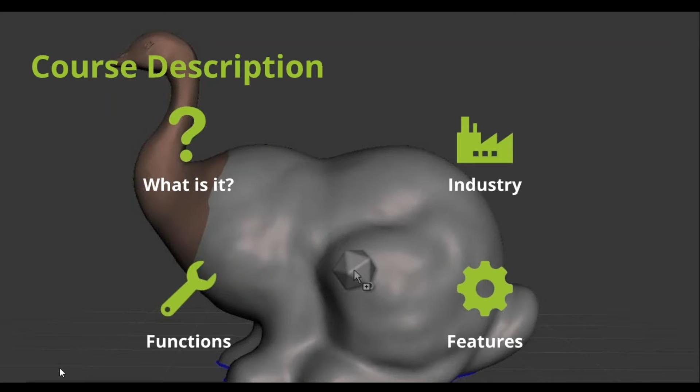Well, let's go into some of what's in the course. For the audience, we have an Intro to Meshmixer course, a Meshmixer Essentials course, working with 3D scans in Meshmixer, creating models from photos, and then Meshmixer for Kids. This is a very extensive library that Nick has created for our community, and I want to give Nick a moment to talk about how he came up with the course. You heard the history with the Kickstarter program, but Nick, tell us a little bit about the structure.

Yeah, absolutely. We've worked with SolidProfessor to come up with an architecture that really does make sense. We have an Intro to Meshmixer, which goes into understanding how the program works. When you start Meshmixer, there's some tools down the left-hand side. We go into what those tools do so that you can understand how the programmers of Meshmixer want you to use it.

And then we go into the Meshmixer Essentials, which is the workflows and how to accomplish certain things with Meshmixer. Once you have the base understanding of the program, you figure out what you want to accomplish, and there will be a Meshmixer Essential to accomplish that, whether it's working with 3D scans, freeform sculpting, or even creating support structures for 3D printing. There's a lot of different workflow things for the essentials. Then we have specialized classes after that, kids classes, sculpting classes, and more specialized content that not everybody wants, but the people that really do want it should be treated appropriately and have a specific class for it.

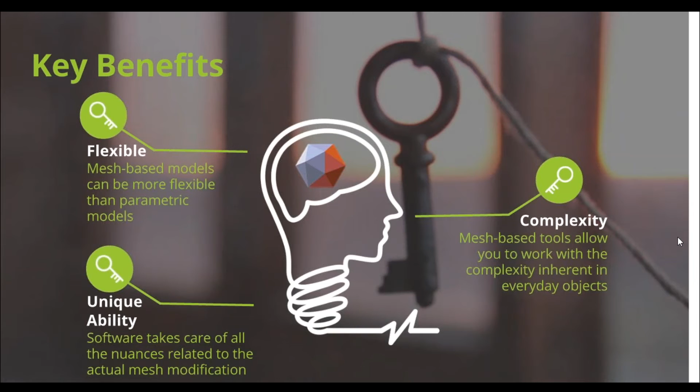If you're 3D printing, there's also a whole section of Meshmixer that evaluates models for 3D printing, so you can create support structures that are organic, kind of like the branches of a tree. In my own 3D printing experience, models that take 5 hours with traditional support structures can be brought down to about 3 hours with Meshmixer's support structures. So a lot of really good benefits that don't exist in any other program.

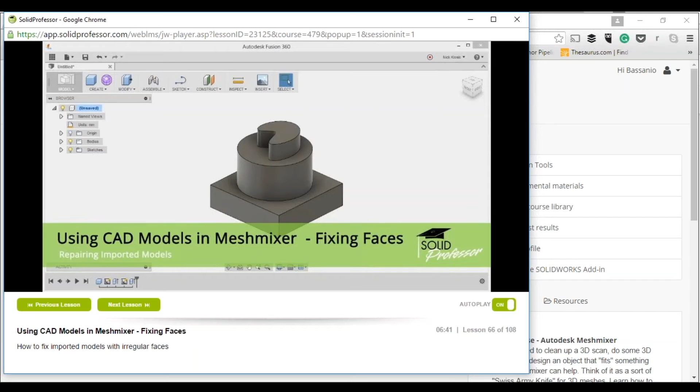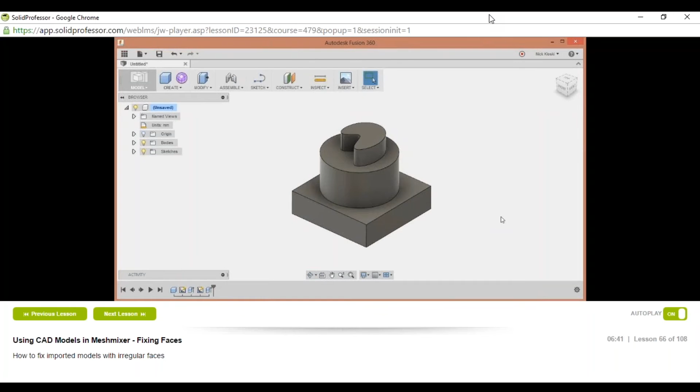Okay, so here's one gotcha when you want to go from parametric CAD modeling into Meshmixer. I modeled something here in Fusion 360, the parametric program, kind of like a little pedestal or awards statue, and I might want to put something organic on top. So I want to bring this into Meshmixer and start working with it. I go into bodies here and export as STL, and send it directly into Meshmixer, so I click OK. After a second, Meshmixer comes up and we get the object right here.

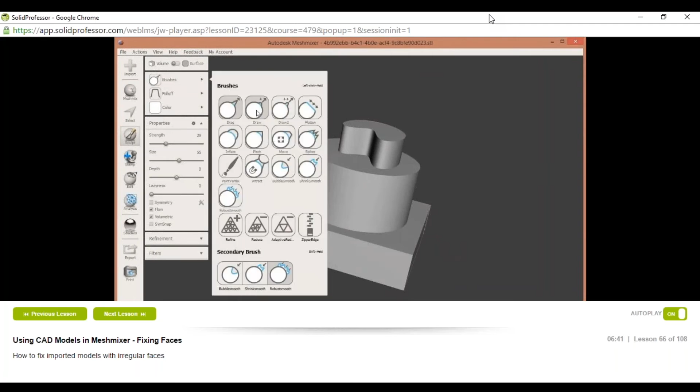So, good enough. We start going into the Sculpt tool, maybe with a draw brush, get a nice big size, and start working, and the entire model just starts to blow up the moment we touch it. It didn't blow up as much here, but I'll tell you why. I'm going to undo this. So this model, if I hit the W key for wireframe, you can see that, and maybe a little bit dark.

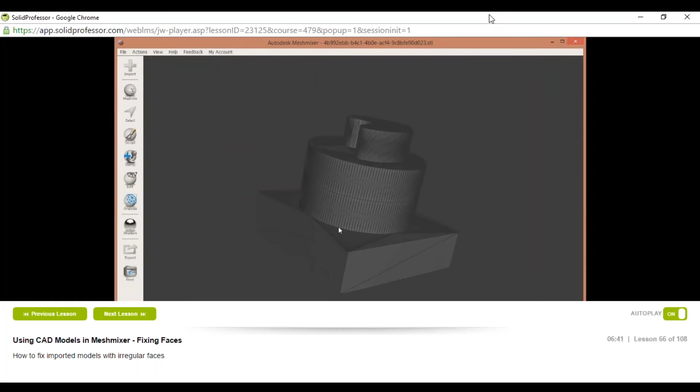So I'll go in. When your model goes dark like this, sometimes you have your object not selected. So you go up to Show Objects Browser and make sure that your object is selected.

So you can see up here that we do have a lot of triangles, and down here we have no triangles. Because Meshmixer wants to work with a lot of triangles, when you hit it with a tool like the...

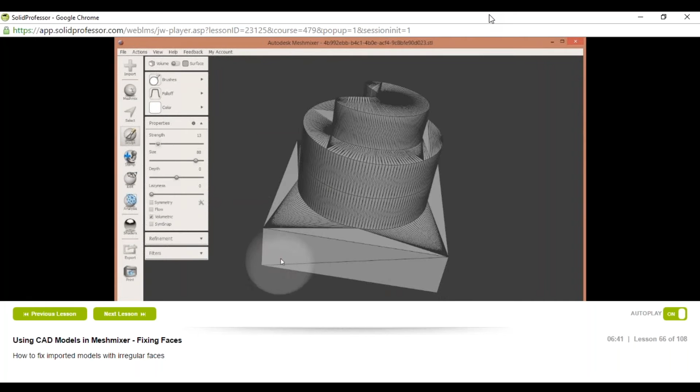Sculpt tool - I'll turn flow off - even at a low strength, it only has 2 triangles to work with, so it starts to do weird things. It changed the entire 3 faces of the bottom.

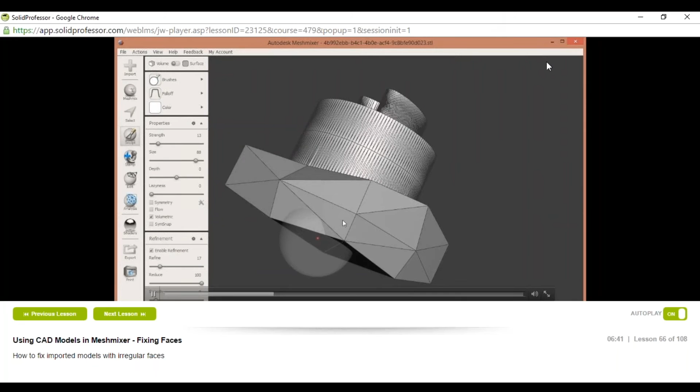Because it only has 2 triangles, and because I have refinement turned on, it starts to add them. But adding more triangles when you only have 2 to start with ends up making huge changes to your mesh.

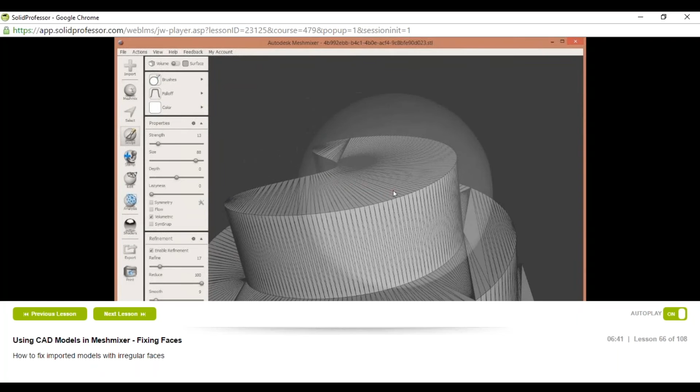If we try to do this up here, the triangles are a little bit more dense, but even up here you start to get weirdness happening, because if I undo this, these triangles go all the way from this side all the way down here. Even though they're skinny like this, they encompass the entire face. So trying to make a change to one triangle ends up changing your entire face like this.

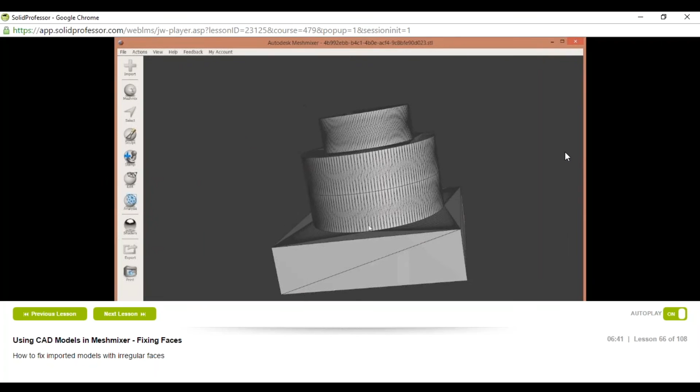And you see this a lot in models that you download from online websites that are created in parametric CAD software. So there's a very, very simple trick to get around this. You need more density inside of this.

I'm going to click on Select and hit Control-A to select everything, or Command-A on a Mac. Everything is selected. We'll go up here to Edit, to Remesh, and you want to choose Linear Subdivision.

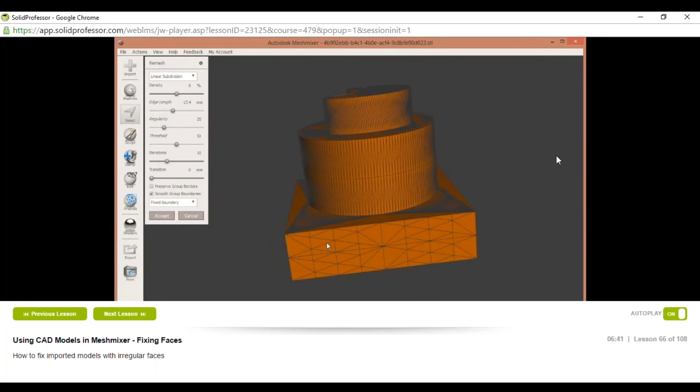What Linear Subdivision will do is divide the triangles that are already there into smaller triangles. So it doesn't change the shape at all, it just adds more density inside. So you're still going to end up with triangles, but your shape isn't changed.

If you did something like relative density or adaptive density, even if it's very, very turned up, you end up with kind of weirdness here.

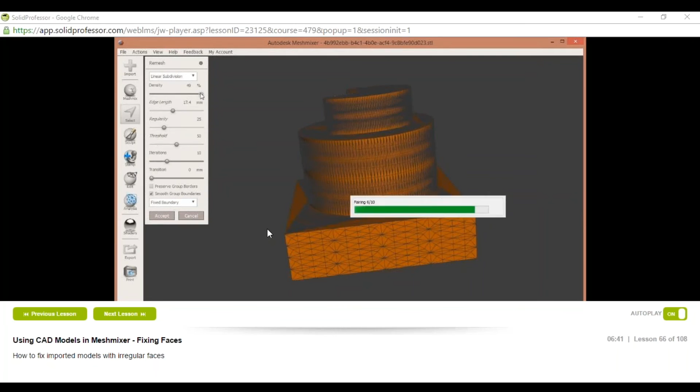So what we're going to do is go to Linear Subdivision and turn it up as high as it will go. Remember, these triangles went from this side to this side - now you see that you have a band here, a band here, a band here. You have a lot more triangles to work with that don't go from face to face.

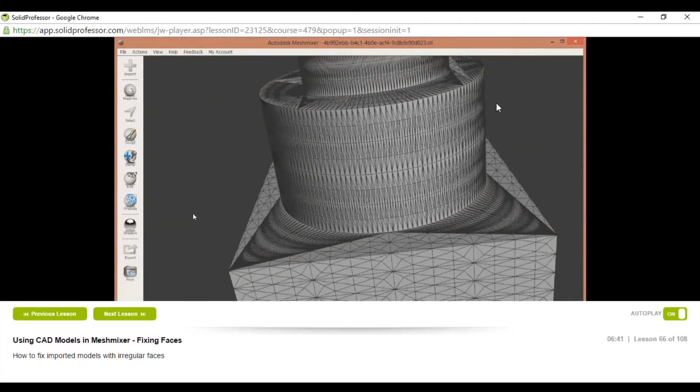So I'm going to click Accept and Clear Selection. So now we have all of these triangles here. You still have some discrepancies - you have this being very, very dense here and not here.

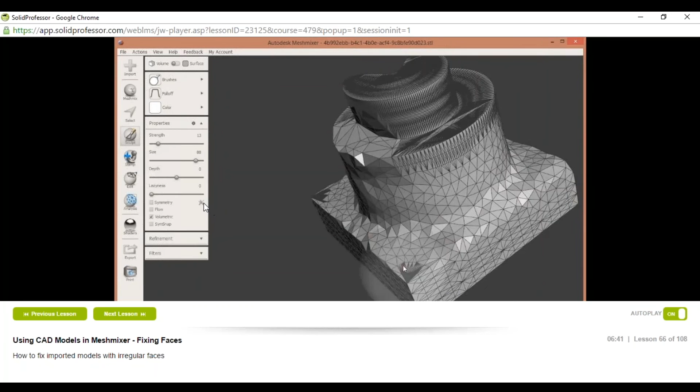But if we click on the Sculpt tool, we have a little bit more of a chance for the Sculpt tool to have a known effect. Obviously this is maybe smoothing out these hard edges a little bit more than you might want, but it's not destroying the entire mesh like it did before.

Now I'm going to undo that. And actually I'm going to undo all the way back to where it was to start off with.

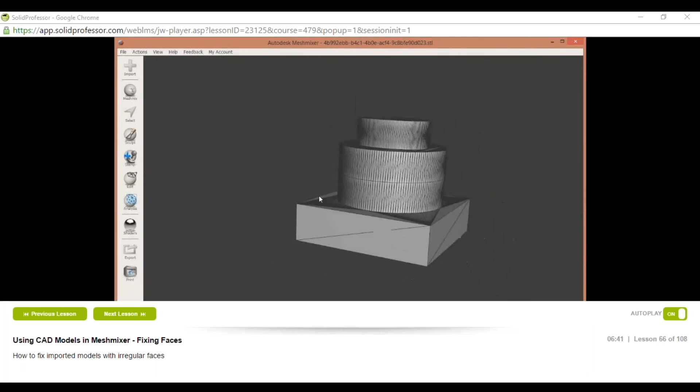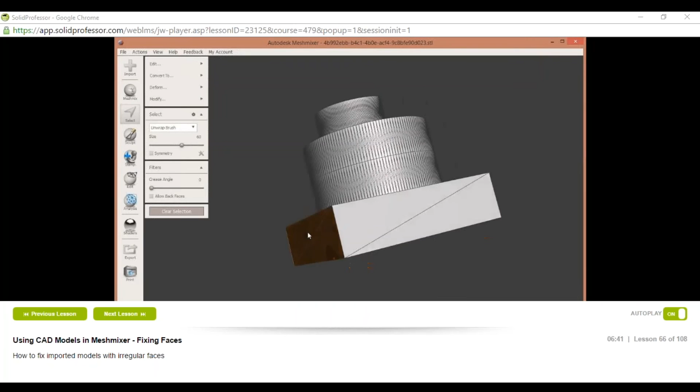So one other trick you can do, if this is something that you want to keep, but you want to make the subdivision only happen on certain surfaces, there's a couple ways to do it. If these are very easy like this, you can always go into the Select tool, make your brush small, and then just click and drag to select only these meshes and the 2 bottom ones, and then run the Remesh tool with Linear Subdivision.

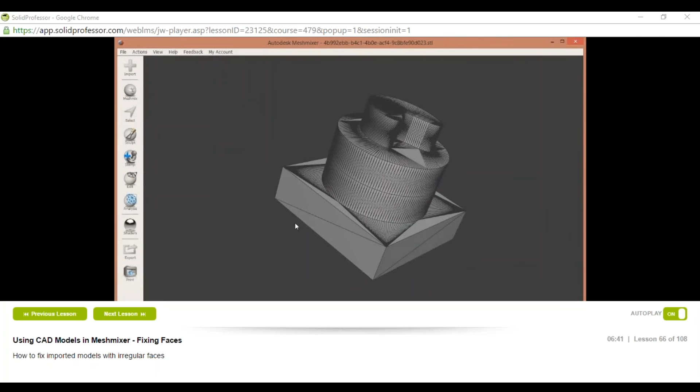So it ran a lot faster, and we're not touching the top of the mesh at all. But if your entire object you want to remesh in a more known fashion, you can also go up here to Edit to Generate Face Groups.

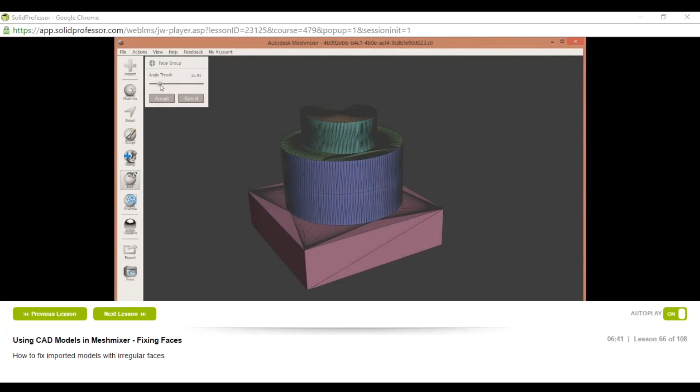So what this will do is split based on angle threshold. If we turn it down, everything becomes its own face group, but we don't want that. We want to turn this up so that all of these contiguous areas are all their own face group. I'm going to turn this up until we get a little bit better result right here.

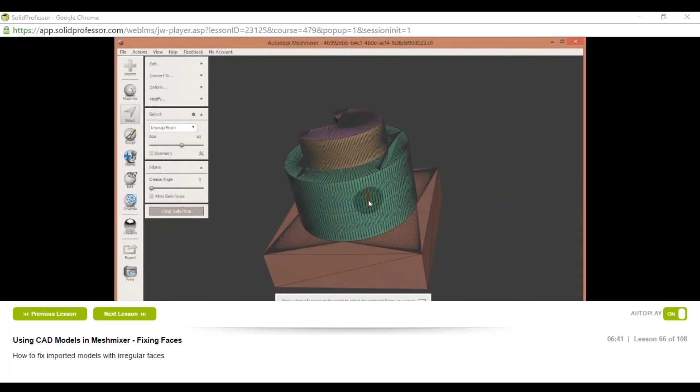And now we have these as all face groups. So I can go into Select and then just double click on this, and it will select that entire face group. Or if I go into Select and double click on this green, it will select just that face group. So that Edit Generate Face Groups command can be very good to segregate your mesh, and now I can go in and just work on individual areas to subdivide them if I want.

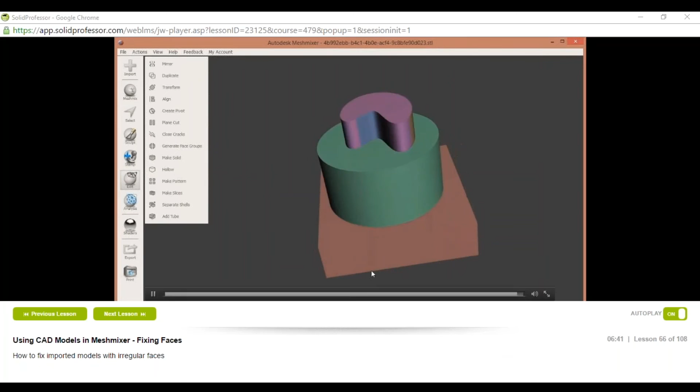So that's what happens sometimes when you bring in parametric CAD models into Meshmixer. You need to actually add complexity before you can successfully work with them.